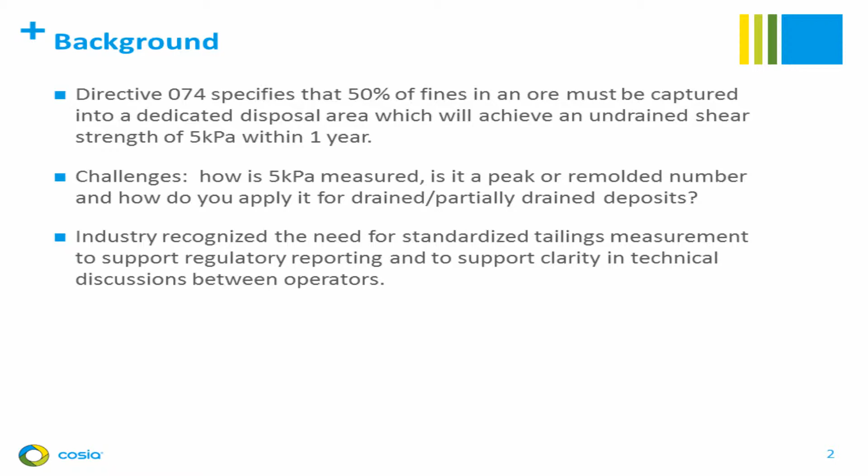So Directive 74, as you know, specifies that 50% of fines in an ore must be captured in a dedicated disposal area, which will achieve an undrained shear strength of 5 kPa within 1 year. This has begged the question, how is 5 kPa measured? Is it a peak or remolded number? And how do you apply it for deposits in the suite of technologies that are not fines dominated and therefore not necessarily undrained? So the industry recognized that there is a need for standardizing these tailings measurements to support both the regulatory reporting and clarity in technical discussions between operators.

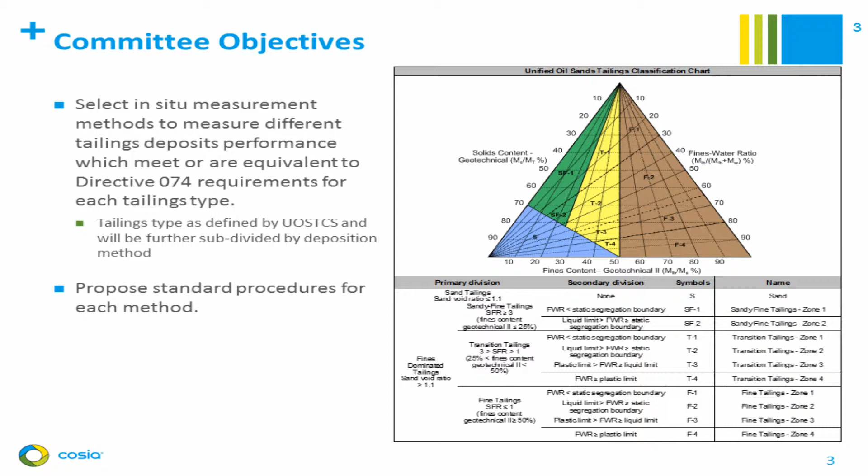So the committee was struck with the objective of selecting an in situ measurement method to measure different tailings deposits' performance which meet or exceed Directive 74 requirements for each tailings type. And the tailings types were defined according to the oil sands classification chart, which was one of the COSIA documents that has been completed for a long time but not yet publicly available. Basically we have fines dominated materials in the brown there, and that's anything with a sand to fines ratio less than 1. The blue area is sand deposits, which is anything with a sand void ratio less than 1. And then you have the two fluid regions that are sand dominated. We have transition material, in yellow, which is a sand to fines ratio between 1 and 3. And the green area is more sandy, segregating sand, which is a sand to fines ratio greater than 3. And we were supposed to propose a method for each of these deposits.

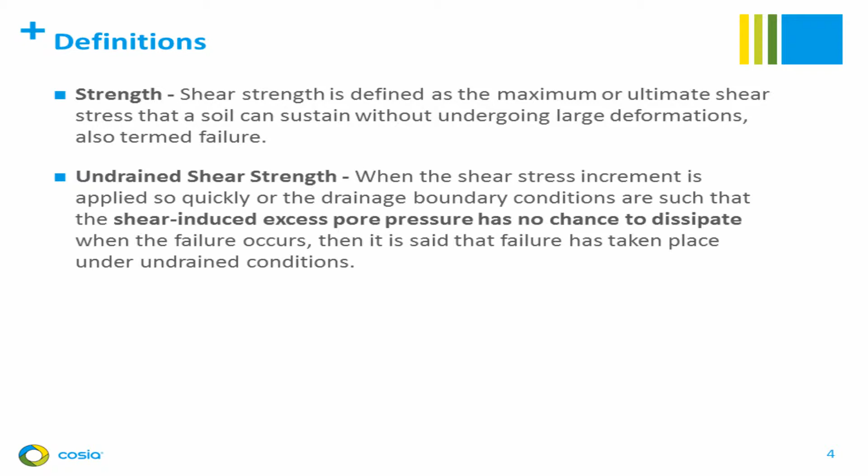So it was really important to first define what it is that we mean by strength. A shear strength can be defined as the maximum or ultimate stress that a soil can withstand without undergoing large deformation or failure. And an undrained shear strength is basically the shear stress where the shear-induced excess pore pressure has no chance to dissipate. And this is really, really important. So therefore, the failure can be said to have taken place in undrained conditions. This means that if you are trying to measure an undrained strength, you have to have undrained conditions. And that was a key component of our discussions in our committee.

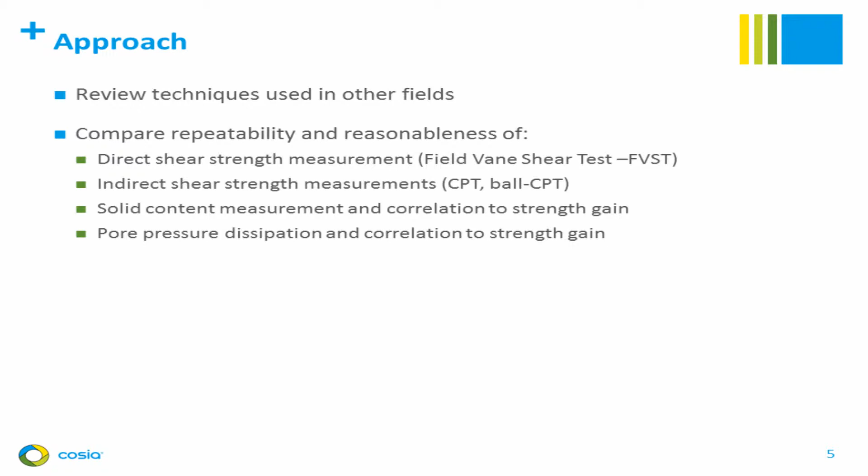So our committee's approach was to review the techniques used in other fields, to compare repeatability and reasonableness of different techniques, including field vane shear tests, CPT, ball CPT, and then the idea of using solids content to measure strength gain, measuring solids content to prove that you're on track for consolidation, and the idea of using pore pressure dissipation to correlate to strength gain, again, that idea of tracking to consolidation.

So the results of our work, this took a year of many weekly meetings and discussions and consultations with experts and literature reviews. And we came to a very quick agreement that field vane testing and cone testing were very good methods for measuring undrained deposits. So anything in that brown area, we're like, yep, fines dominated, it's clearly undrained, we can measure it. There was a lot of debate as to, for the yellow and green and blue areas, is it undrained? Does it matter? Is it something that we can measure? And we basically decided that if it is not undrained, you cannot measure an undrained shear strength in it.

So we also reviewed pore pressure measurements to show that there's significant technical challenge with using pore pressure as an effective method of measuring stress and strength in the deposit. And David's question actually kind of alluded to some of the challenges we encountered in our literature reviews on that.

It's very complex, it is an indirect method, and there's challenges with getting sustainable long-term pore pressure measurements in an active deposit. You can measure it, but can you measure it in the same place with the level of accuracy needed to measure 5 kPa of strength? And we decided that that would be way too hard and give us more headaches than it was worth for this Directive 74 compliance.

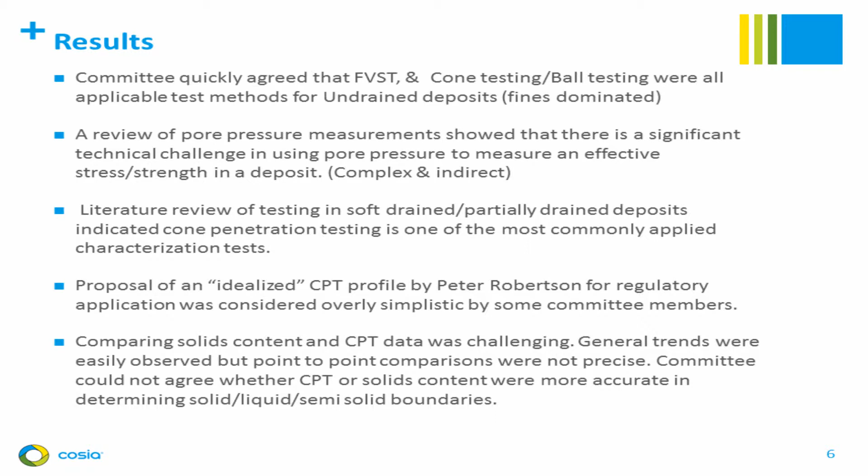And when we consulted with industry experts, such as Peter Robertson, who's in the audience today, he proposed that we use an idealized CPT curve that would basically say, okay, this is what it should be if it was at 5 kPa undrained shear strength, and if you achieve anything above this, it would be meeting that strength. We decided as a committee that approach was too simplistic for regulatory requirements, and we were not going to recommend that at this time.

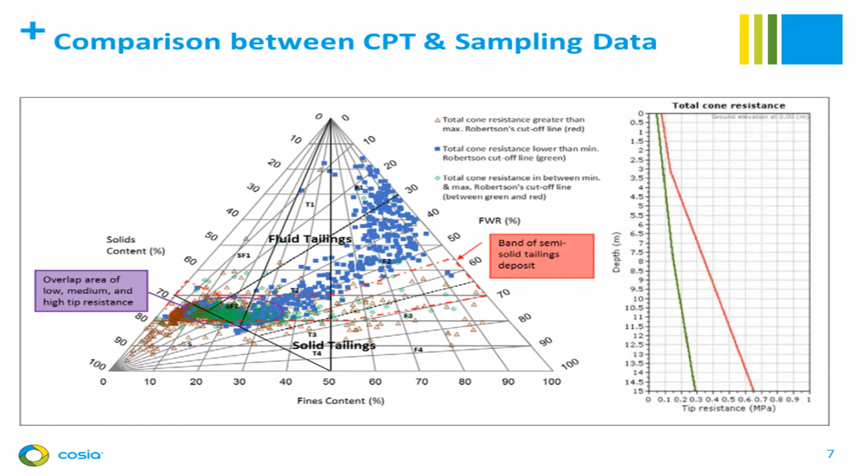And so it's very challenging to be able to draw a clear line just with solids content. And it's also very challenging to say, well, which measurement would we rely on more? And that's why we ultimately couldn't make a recommendation in this area.

So we decided that undrained shear strength, as specified by Directive 74, can only be measured in undrained deposits. And we defined undrained deposits, after some consultation, as deposits having an SFR less than 1.5 or a time to 50% pore pressure dissipation greater than 100 seconds, as measured by a 10-square-centimeter cone with a pore pressure measurement at the cone shoulder. And this is based on some work that DeJong et al. had done.

One caveat is that the oil sands standard is to measure with a 15-square-centimeter cone, in which case you can still use that time to pore pressure dissipation of 100 seconds, but you need to carry out your cone testing at a reduced speed of 1.6 centimeters per second. And this way you could potentially use undrained shear strength in your composite tailings if you can prove that it's actually behaving in this undrained manner.

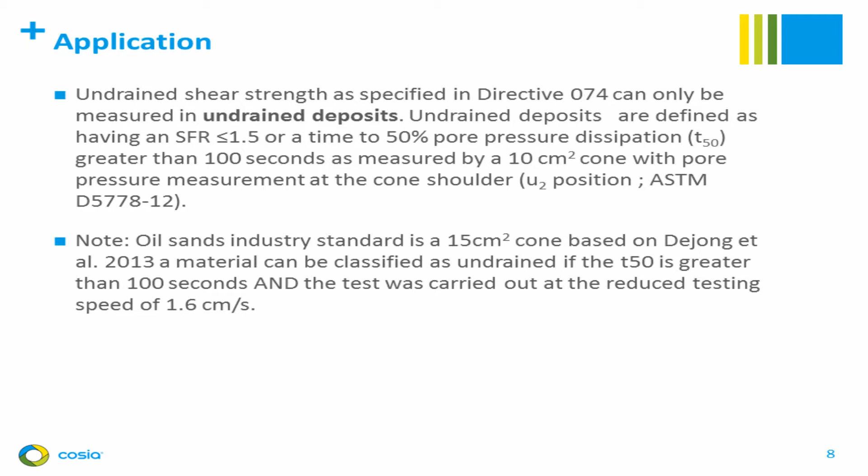The measurement methodology that we recommended was using either CPT or field vane shear testing. We felt that field vane shear testing is the direct kind of calibration standard, but in order to actually get that calibration standard, you have to push a cone first. And the reason why you need to do that is you need to confirm that you are in fact measuring an undrained shear strength. And so you need to confirm that you have undrained conditions if you are uncertain, and that you aren't in a sand layer.

The method of measuring, so CPT, ASTM standard, we felt was satisfactory, and we didn't have any changes to that. Ball CPT, we said that using a ball is pretty much the same as using a cone testing with a different tip, and DeJong et al. had proposed some modifications to ensure you got good, reliable data, and we agreed with those modifications. And in interest of time, I'm not actually going to read them out, so you will be able to refer to them in my paper.

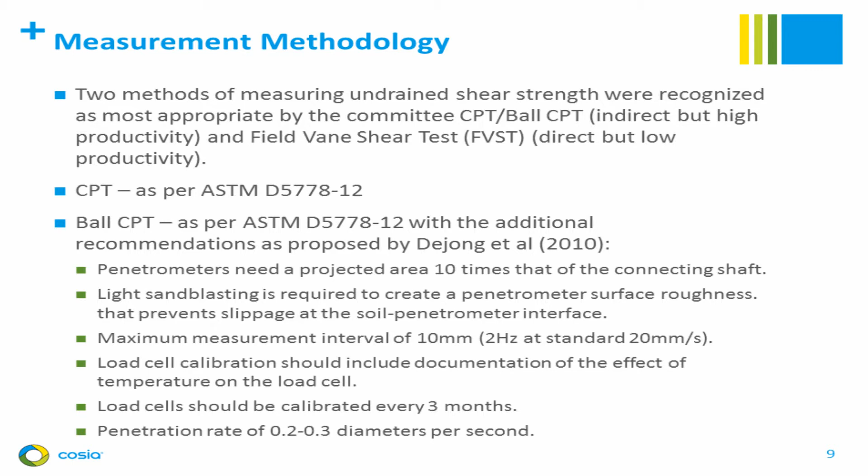The measurement methodology we found the most challenges with was the field vane shear test. Although ASTM D2573-08 is a great standard, we didn't feel that it gave us the sufficient accuracy and repeatability at the low end of the scale, which is what we're interested in. Therefore, we commissioned Dr. John Howie and Dr. Peter Robertson to write us an addendum to this that they would feel could give us the accuracy in these very soft deposits.

Some of the key changes that are in this addendum are they increased the allowed vane size to 150 millimeters, which happily is the one that we've been using for measuring a lot of these soft deposits already. Keeping the vane area ratios similar, some rules around testing and when that should be. And also, it's really important that you have a load cell that's capable of measuring to that precision of a half a kPa and has been calibrated to do so. So making sure that you have appropriate calibration and you're getting that level of accuracy from your load cell.

One other thing for the field vane test is that we said we really needed to have that plot of your torque versus rotation in terms of vane shear stress and rotation, so that you can actually see what was happening and denote the rates of rotation at various points to ensure that you're actually following ASTM standard on your rates of rotation. So really important to have that documentation and that geared crankshaft.

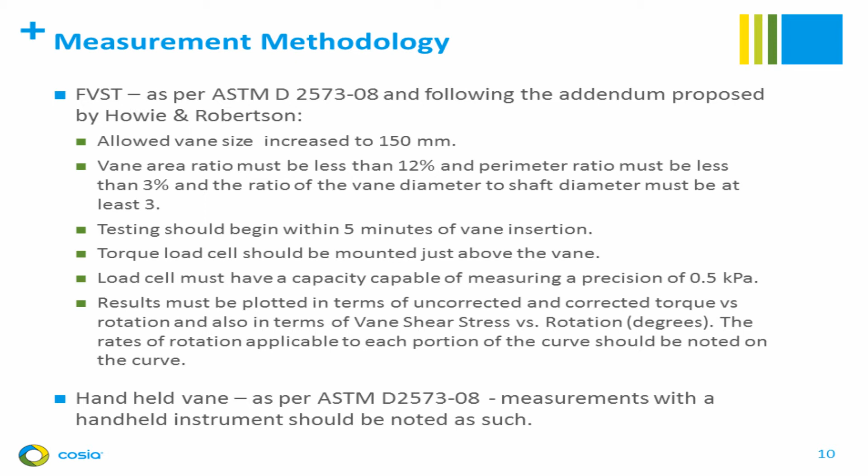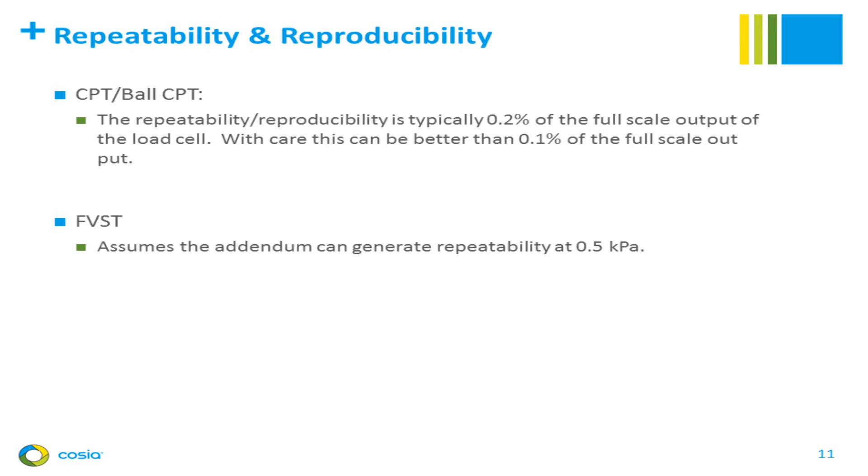For the repeatability and reproducibility, we felt that the ball CPT could give us better than 0.2% of full-scale output. With care, this is better than 0.1%, and there's a lot of argument that this can actually be really quite good if you've calibrated your load cell at appropriately high precision at the low range. Field vane standard, we're assuming that we can generate the repeatability at 0.5 kPa using this addendum.

Handheld vane testing is an appropriate technique. Other tests can also be used so long as they can find a good, suitable correlation to these CPT or field vane tests. And so we left that open: if you can show a good correlation and the regulator is happy with it, we're happy with it as well. And it's important to note that this threshold of 5 kPa is really at the low end of shear strengths typically measured, and you have to take a lot of care with getting good measurements here.

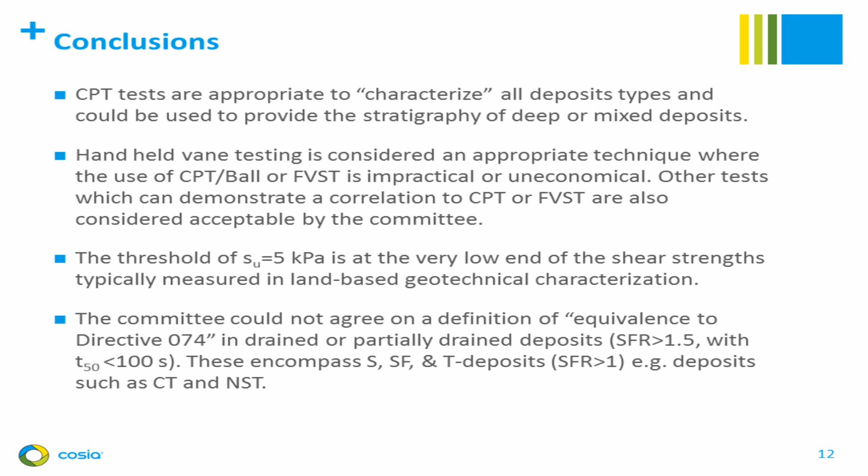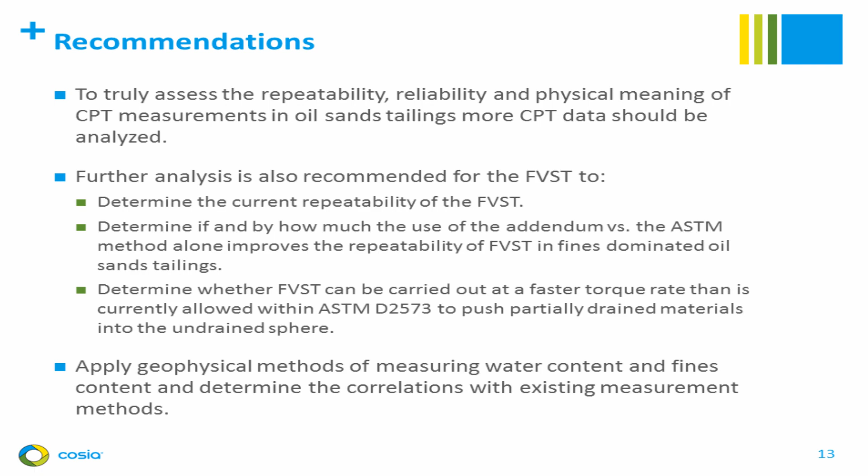So we could not agree on an equivalence to Directive 74 for other measurements in these deposits. And we recommend that to assess the repeatability, reliability, and meaning, perhaps more data should be analyzed, particularly in these overlapped deposits, looking at those grain size distributions and seeing if we could get some more reasonableness out of the data. And I know I'm running out of time, so I'm going to end there.